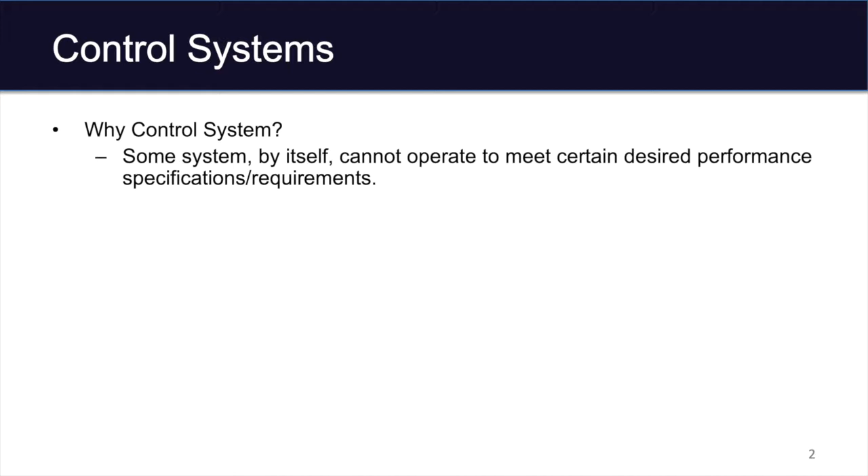Control systems are commonly seen in our daily life. And we use control systems because some systems by themselves cannot operate to meet certain desired performance. And this is commonly seen in our daily life. And the goal of a control system is to make sure the system at hand can operate according to a user-defined behavior. And what is more important, we want it to be able to accomplish this in an automatic manner.

And what are the desired features of control systems? First of all, we want it to be stable. We don't want it to fall apart easily. We want it to have a certain self-diagnosis and self-recovery capability so that we can return to a desired performance even though there can be some uncertainties, unexpected events, and so on. Secondly, we want it to have the capability of reference tracking, meaning when you set a certain desired performance, you want it to track and behave exactly as you have expected it to do.

And third, in terms of uncertainties, unexpected environments, unusual environments, or if you have certain disturbances or noise, you want the system to be able to reject them and to compensate properly such that you can still have the desired performance. And we can think of a control system in our daily life like air conditioning, where you set a temperature on a thermostat, and the air conditioner will run when required, or heat up this room when required. And its disturbance could be people going in and out of the room, opening the doors, letting the colder or hotter air in. Someone may open the window, right? Maybe someone is boiling coffee in the room, which can make it a little bit hotter than usual.

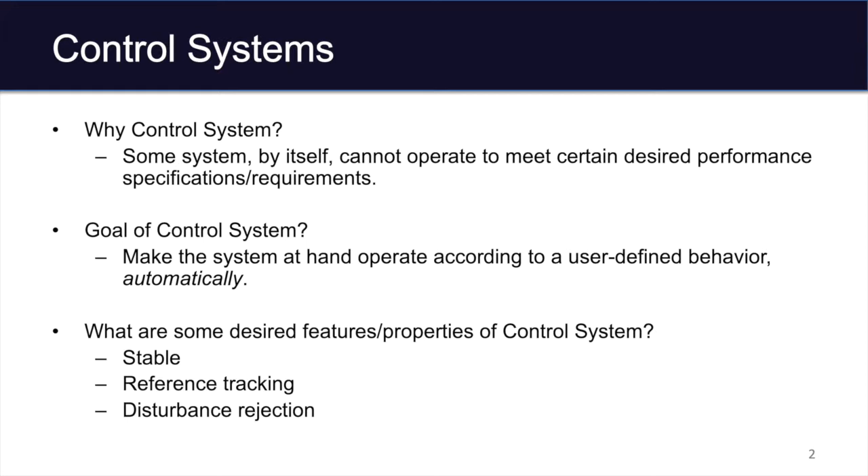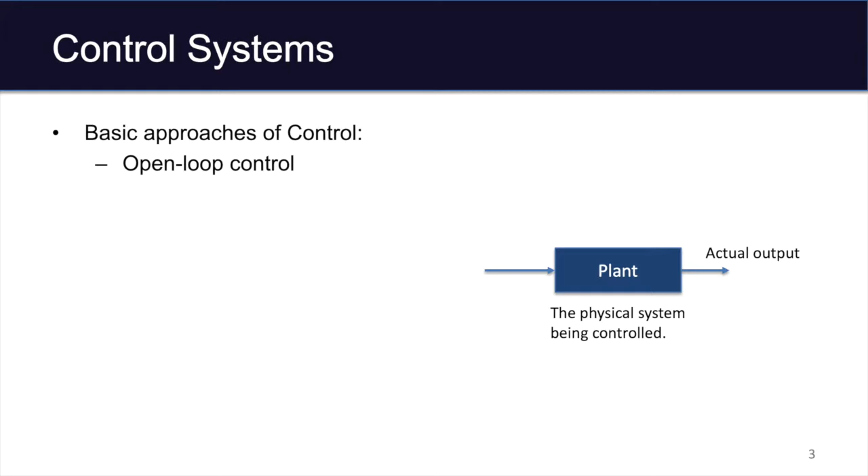The basic approaches of control are usually categorized into two types. One is what we call open loop control. So when we have a control system, we usually have a plant. This is the physical system being controlled, right? It could be the room when you talk about air conditioning. It could be your car when you talk about cruise control. And you care about the actual output. It could be the room temperature, could be the speed you're driving.

And to make that happen, in open loop control, we have to have a desired output. This is the desired performance, desired behavior. We usually call it the reference. And you want your output to behave, to copy your reference. And to accomplish that, you need to have a controller, which is a device that calculates the control signal based on the desired output and the features of your plant. And this can be realized by a computer, a circuit, or by pulleys, chains and belts, a mechanical system, or with springs and dampers and so on.

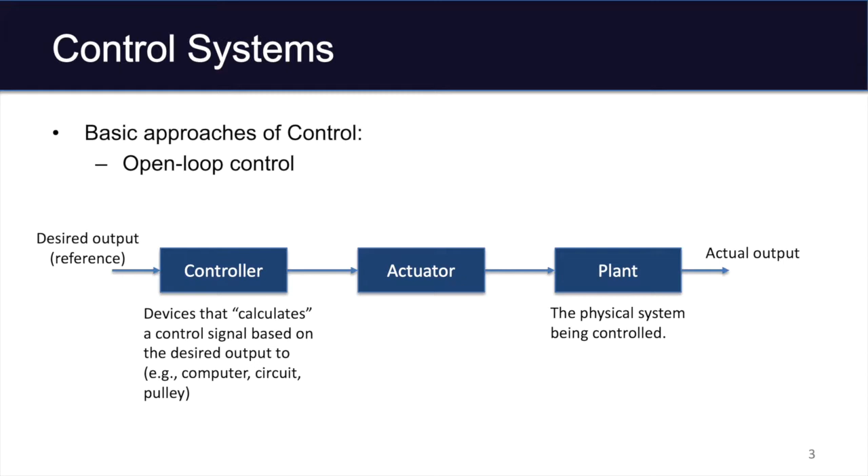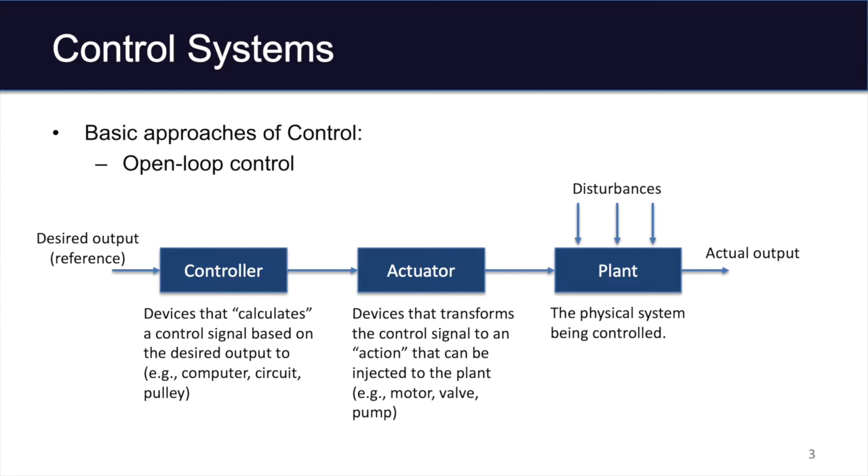The actuator in the middle is the device that will do the actual work. And it will transform the control signal calculated by the controller to an actual action to be injected into the plant. It could be motors, drives, valves, pumps, and so on and so forth. Could be a water faucet. But we're usually living in a non-perfect world. We have to think about possible disturbances and unexpected occurrences of certain events.

Now, a closed loop system starts with just what we have in an open loop system: controller, actuator, and plant, the same as before. But to close the loop, we're continuously monitoring the actual output of the plant by a sensor, sometimes called a transducer, and comparing the sensed or measured output with the desired output, the reference. Okay? As you can see, we have the plus and minus sign here.

And the difference of the desired and actual outputs is what we call the error signal. And now the error signal will drive the computation in the controller, and then the control signal will be sent to the actuator and then to the plant. Now, the reason we call it closed loop is because now you have a closed loop. The loop refers to going from the desired output, the reference, to the actual output and coming back. And because we're feeding back the output to compare with the desired reference, this is also called a feedback system or feedback control.

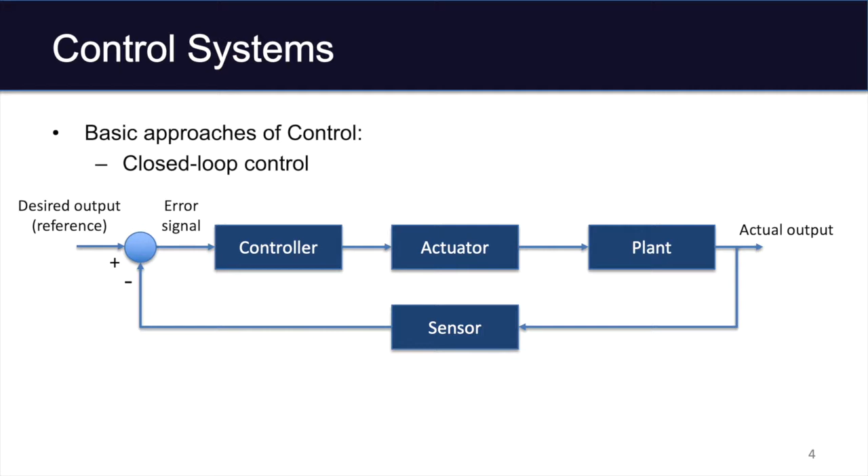Now, in addition to the disturbances that you have to care about as you have in the open loop system, you also have to worry about the noise and precision in the sensor. And this can become very critical in designing a closed loop system. So typical examples like the air conditioning system we talked about earlier and the cruise control system are examples of closed loop feedback control.

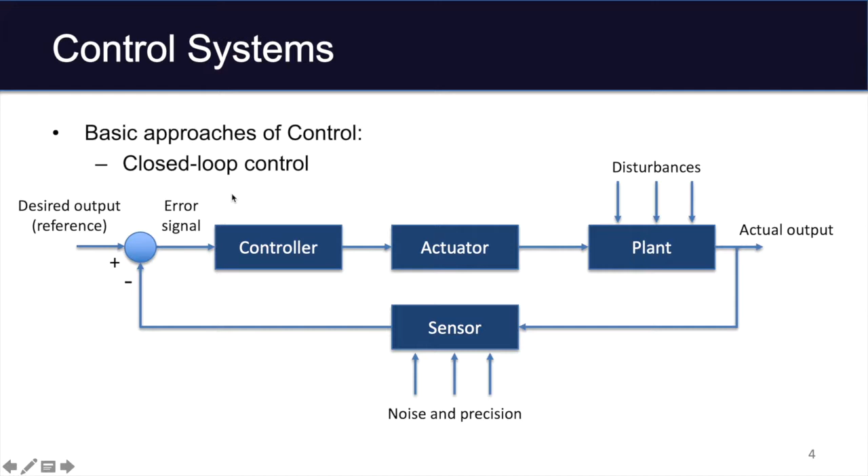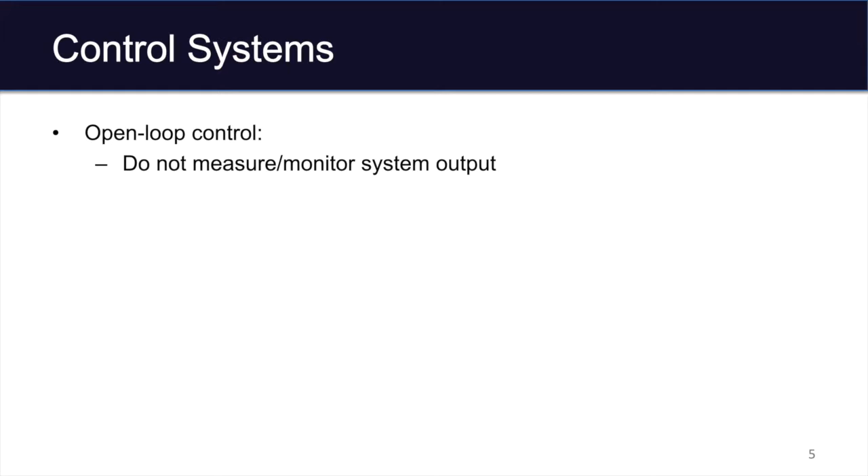Now, open loop control, the pros and cons are as follows. First of all, open loop control does not measure or monitor system output. It uses some predefined calculations to come up with the control signal. So there's no on-the-fly input adjustment. If certain unexpected things happen or certain disturbance, the control system won't take notice. It will still use the predefined control signal to drive the plant anyway. Of course this may not be a desirable feature.

And the control system performance may be easily affected by the disturbances in the plant or outside the plant. But the pro is open loop control systems are usually very cheap to implement. Okay? You don't need a sensor, and the control action, the calculation by the controller, is usually also very simple.

And examples are easy. Talk about room temperature, right? Most of the rooms nowadays have air conditioning, but there are some rooms that do not. For instance, some of the classroom buildings at UConn do not have air conditioning. And what happens on a hot day is you will find the electrical fan in the room.

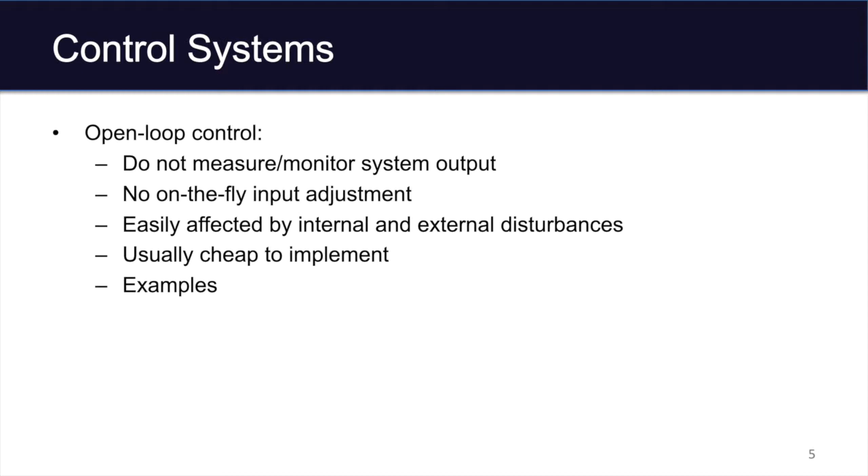But the fan itself does not monitor room temperature. You can only set the speed of the fan to low, medium, and high, right? And no matter how hot or how cold the room is, the fan itself cannot adjust the speed. This is clearly open loop. If you want to close the loop, then you want to have a human operator go there and adjust the speed based on the feeling. But now you're doing the sensing, the human body becomes the sensor. And you yourself will be the controller to change the fan speed.

Closed loop or feedback systems continue to monitor the output and utilize the information to adjust the system input accordingly. And it has the capability to reject internal and external disturbances if you design the system properly.

But remember, because you have the sensor and the controller in the feedback system, it is usually more complicated, and the system overall performance heavily depends on the quality of the sensors and controls you selected. And because you have sensors and those complex controllers, it can be relatively more expensive compared to open loop control. And examples we have already talked about, right? We have air conditioning, we have cruise control. You can think about other examples.

For instance, your phone, right, can adjust the backlighting strength depending on the lighting conditions in the room or in the environment. If it's too bright, you probably want to have a brighter screen. If you're in a really dark room, the screen light will be adjusted automatically to a relatively low level. That is feedback control as well.

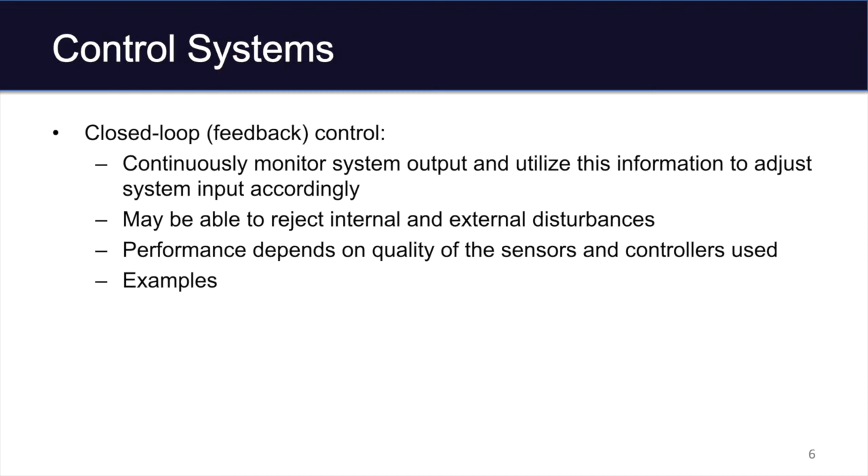Okay? And from this sensing of the speed and calculating by designing the force, the weight of the steam ball, and also maybe you want to apply a spring to apply certain force, this becomes a controller, and the actuator will be the lever and the valve that connects this particular device with the steam engine.

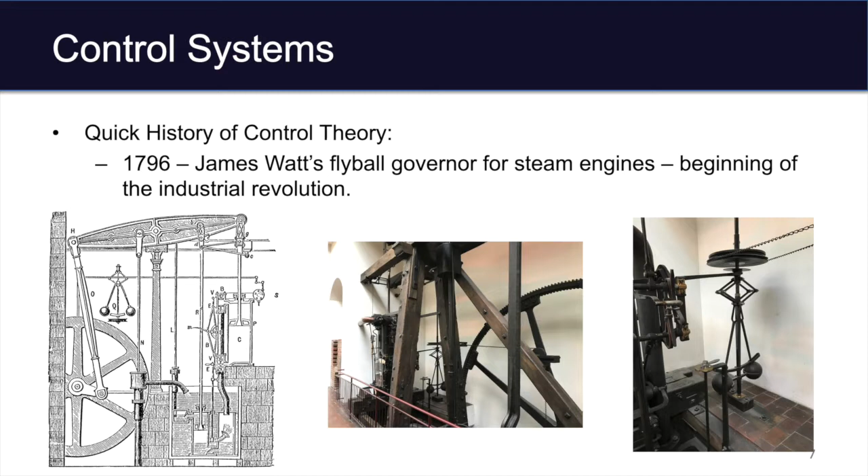And you have all components you need. And from then on, James Maxwell, yes, the Maxwell that's known for the Maxwell equations in physics in electromagnetic fields, analyzed the stability of flyball governor-based steam engine feedback control. And from then on, the entire world starts studying this control theory in Russia, in Europe, and later in America.

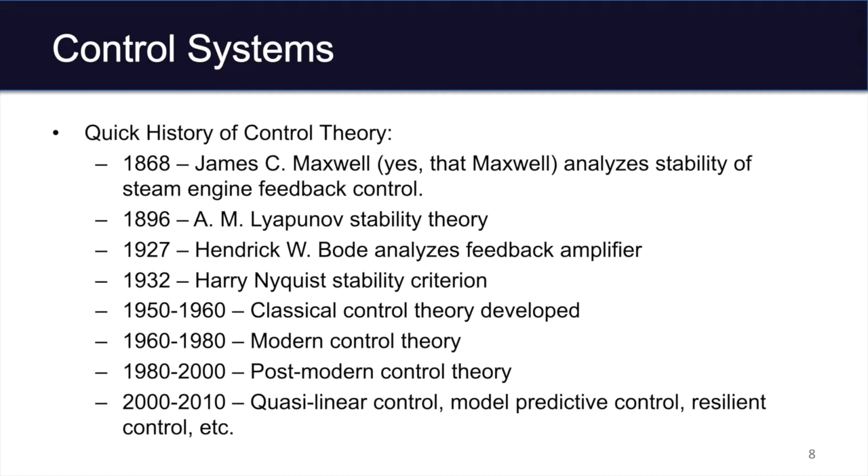A pendulum is usually pointing downward, but of course, if we make it more general, we can make it go upward. It's like you want to stand a pencil on the table. And of course, we know it's very tricky, very difficult, and a small disturbance or shaking the table, the floor, can break the balance and make the pencil go on the floor. But if you can continuously monitor the speed or the angle or the position or the pose of the stick or the pendulum, it's possible to stabilize it.

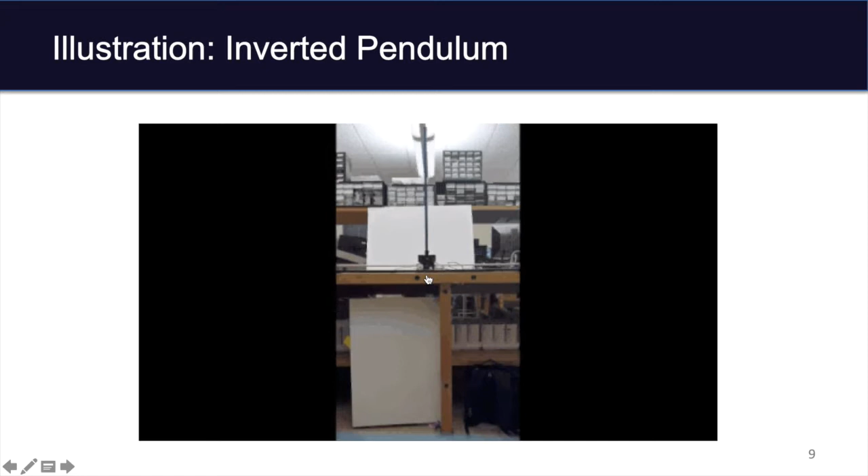You can think of it as a human standing on a Segway or a hoverboard, okay, which you also have this particular application. And of course, you have to design this hoverboard or Segway properly such that the human user does not fall to the ground easily.

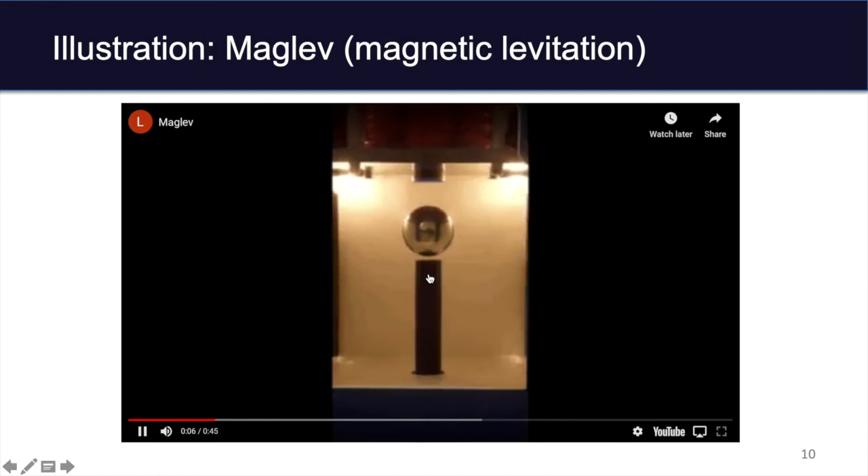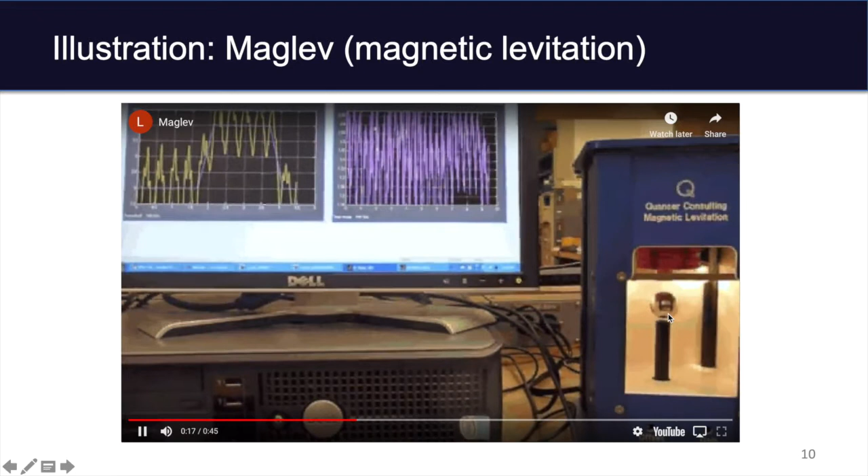The second illustration is what we call the maglev, magnetic levitation. This is a simple version or a simple application that can be generalized to, for instance, high-speed train systems or some of the high-rise building elevator systems that use magnetic force to levitate a certain object. And this is also an unstable system because the gravity and the magnetic force have to balance. And if you apply certain disturbance to this, it will break the balance easily.

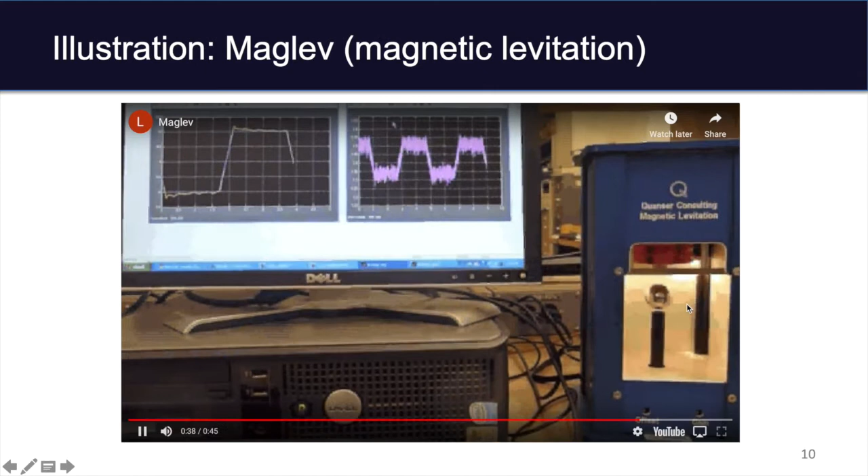And the control system has to calculate the voltage or current to be applied to this electromagnet and apply the force to balance the gravity even in the presence of certain disturbance.

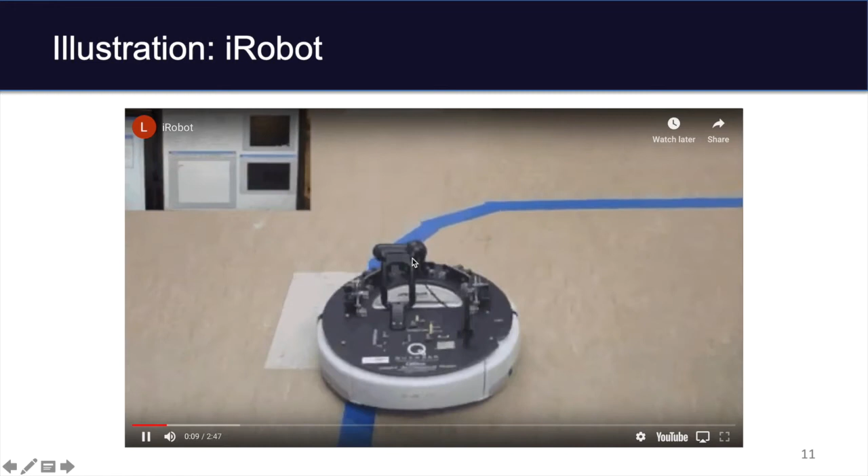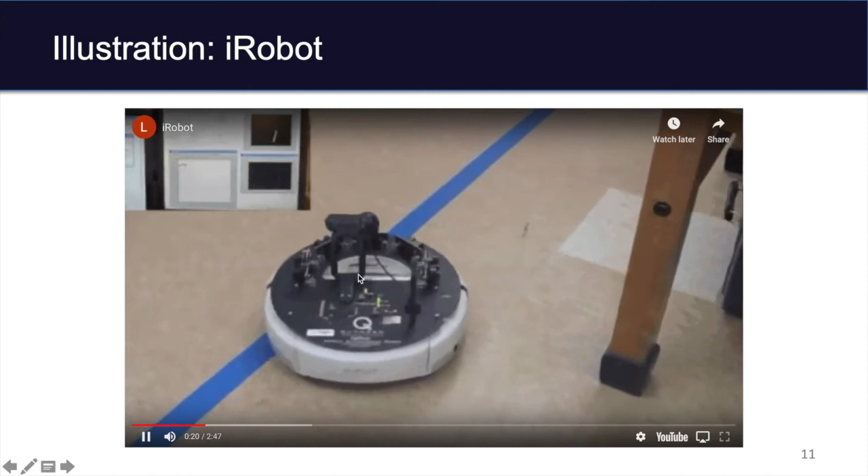Right. The third example is iRobot, which shows how a robot can track a determined path using a webcam being the vision sensor, such that this will tell the robot which direction to go, and then the actuators will be the motors and the turning motors underneath the robot that dictate the direction and speed where it goes. You have to rotate here and there to survey the area to find this particular path that this robot is designed to follow.

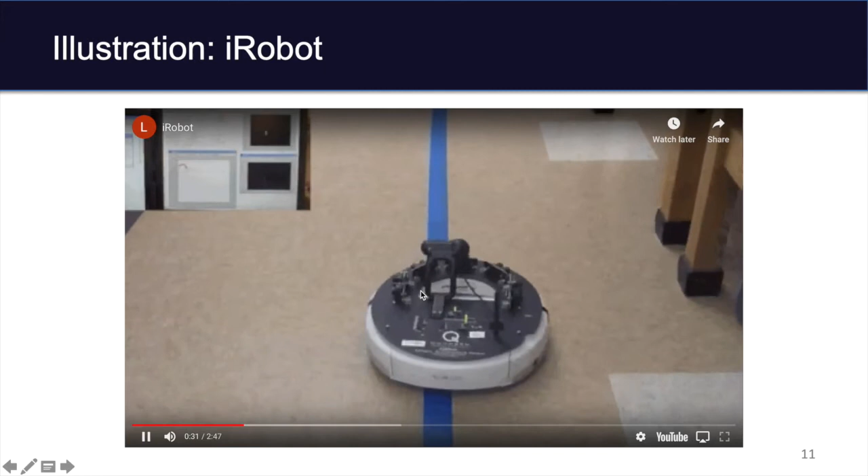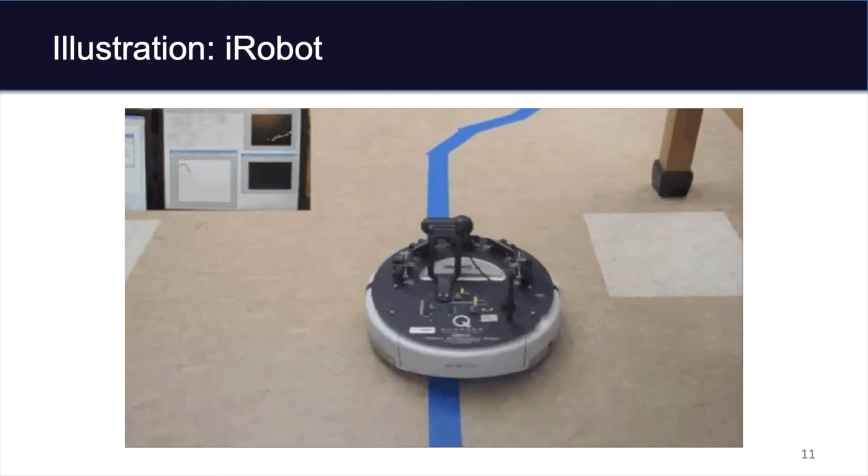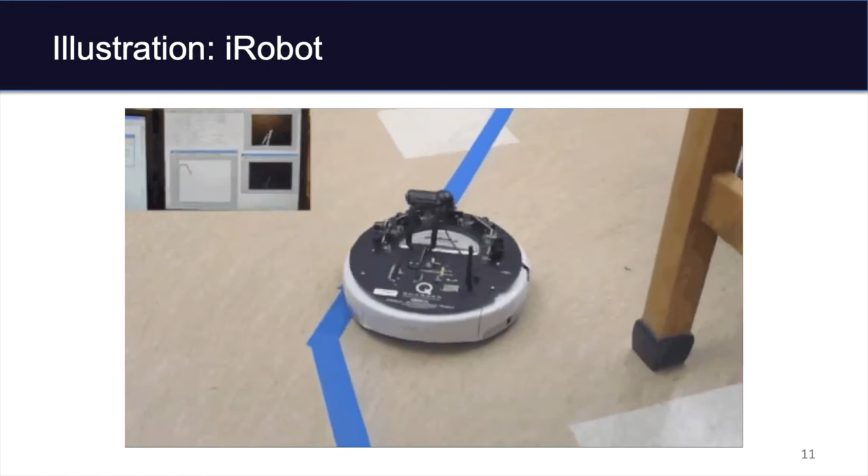And think about an open loop version of this: you design the path, you put this map to the robot and let it follow this particular angle in a perfect plan. But if someone happens to maybe run into this robot, change the course or change the position a little bit, and for instance, if this guy is not traveling on a very level surface, your perfect predefined travel plan may not work, and this robot can easily go off course and will not be able to follow this path properly.

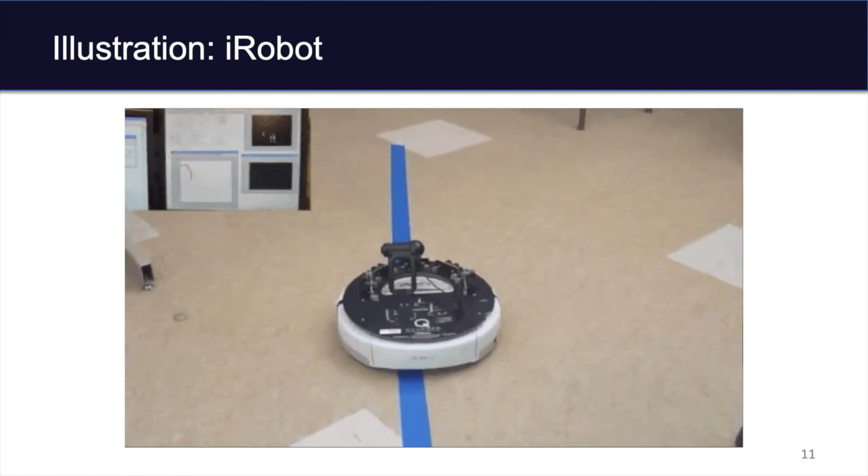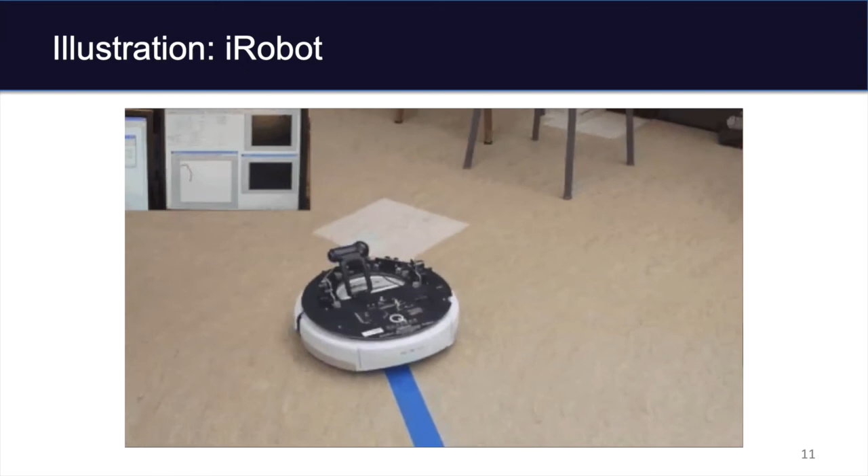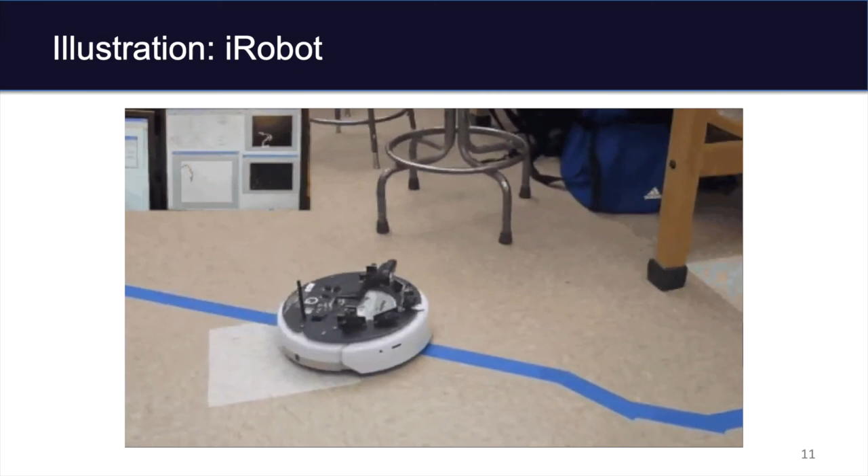And this path following application may happen, for instance, in manufacturing facilities where you have automated guided vehicles that transport parts from one place to another. It can be, for instance, in an Amazon warehouse where all the shelves, all the products are stored on big pallets that will be transported by those robots from one place to another, such that the operators will be able to pick and place the desired product that the customers ordered on the truck or delivery transportation. So this is the iRobot application.

This is the end of this lecture. Through this lecture, you should have learned the basic concepts of control systems, the basic approaches of control, and should be able to identify the components of an open loop system, a closed loop system, and give some examples from your daily experience, personal experience, the examples of open loop control systems and closed loop control systems, and can identify the components from those examples.